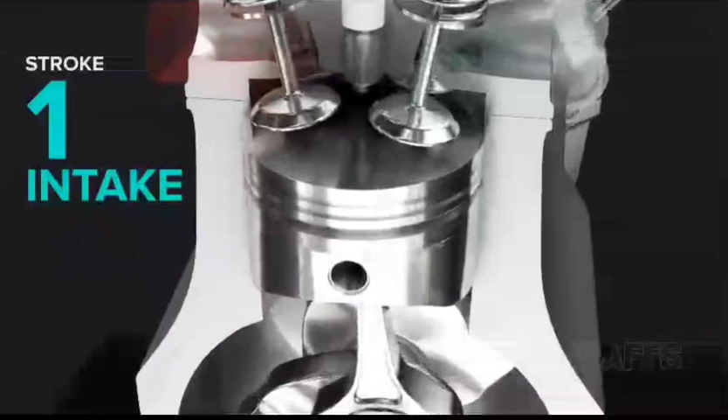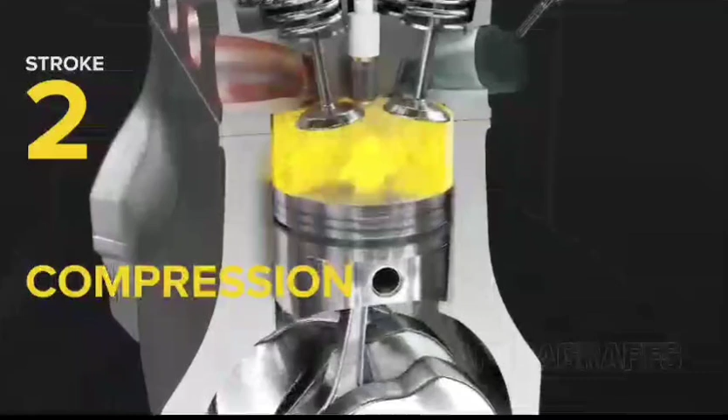First, intake. The piston descends, sucking an air-fuel mixture into the cylinder through the intake port, with both intake valves open. Next, compression. With all valves closed, the piston comes back up, compressing the fuel and air mixture for more powerful combustion.

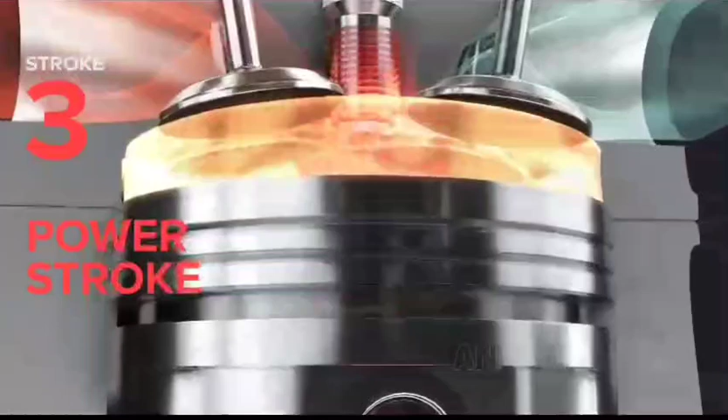Then, the power stroke. An electrical spark ignites the compressed fuel and air mixture, and the resulting combustion forces the piston to the bottom of the cylinder again. A connecting rod transfers this power to the crankshaft. Finally, exhaust. The piston comes back up, pushing the spent mixture out through open exhaust valves and the exhaust port,

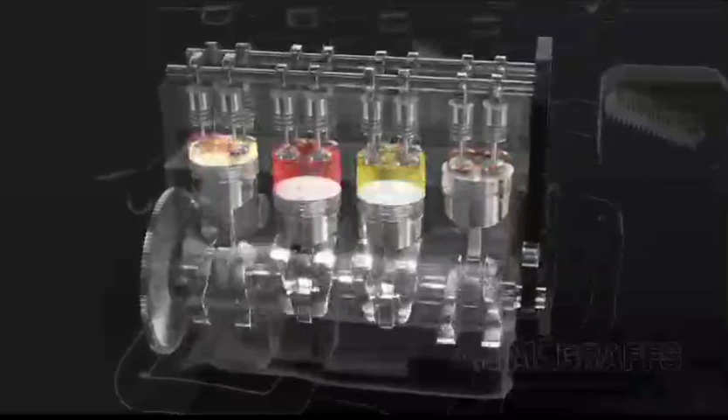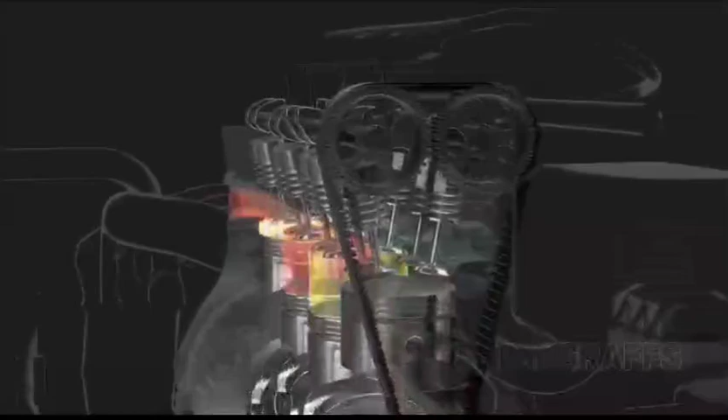connecting multiple pistons. For smooth power delivery, pistons take turns firing. The firing order for this engine is 1, 3, 4, 2. Camshafts with specially shaped cams push spring-loaded valves open in turn. Cam gears and a timing belt or chain link everything to the crankshaft, and it all spins together.

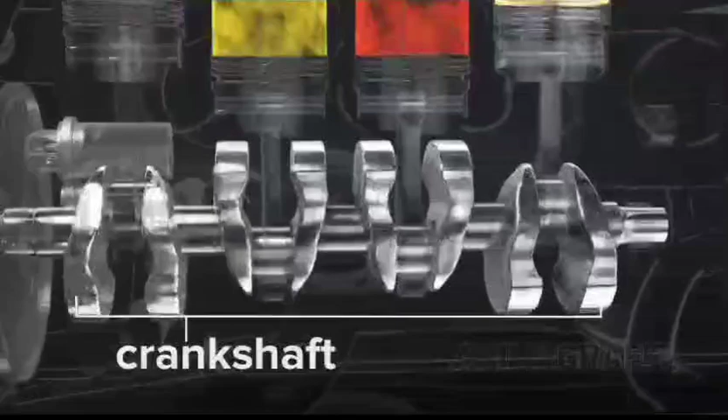The crankshaft translates piston power out of the engine. It has counterweights to balance against the pistons for perfectly smooth revolutions. This is what RPM means. We're counting the number of full crankshaft revolutions per minute.

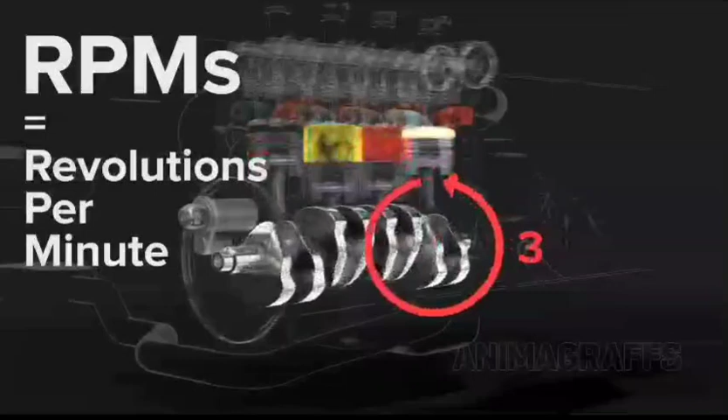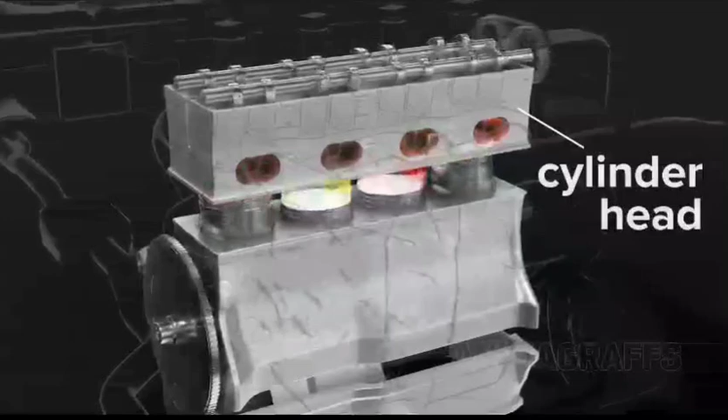The engine block holds the crankshaft and cylinders, and the cylinder head holds valves, ports, cams, etc. A geared flywheel sits at one side of the crankshaft for connection to a transmission. It's also where the starter connects to the system.

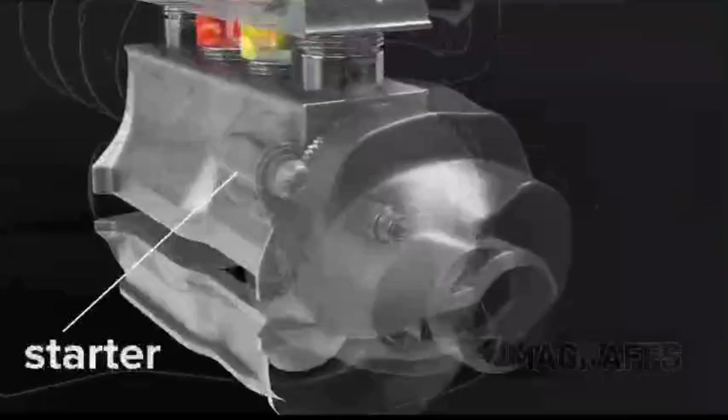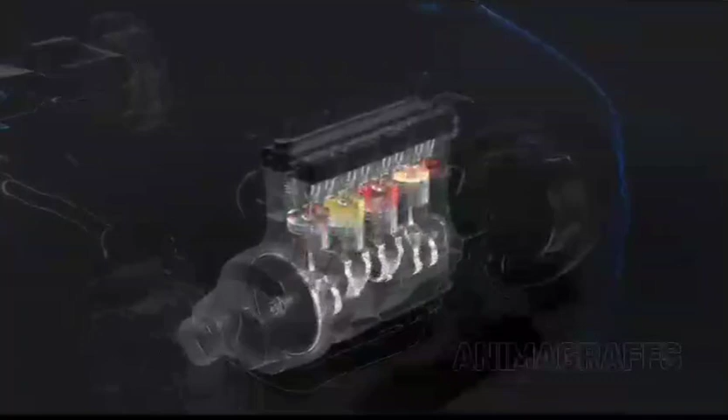This engine has 4 cylinders arranged in a single row, but there are many other possible configurations, like 6 cylinders with 3 on each side, angled in a V-shape, or 8. Despite different design goals, the basic engine parts are all there. Now let's look at other systems that support this combustion process.

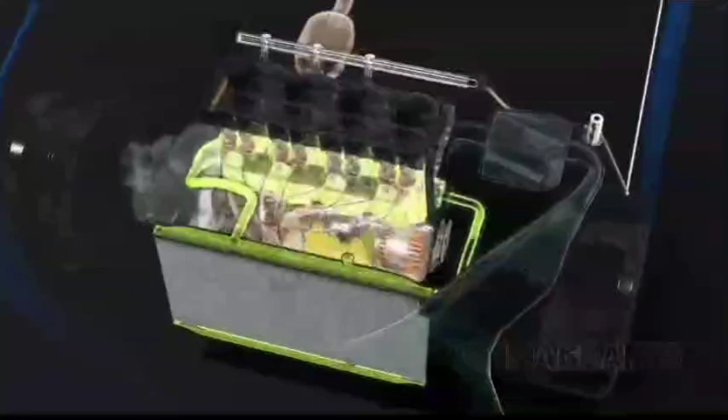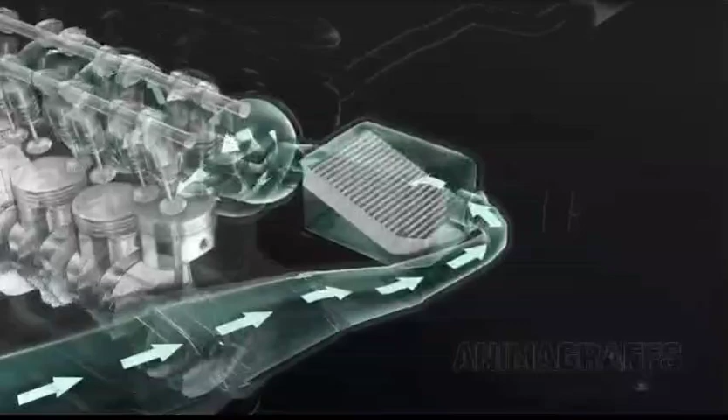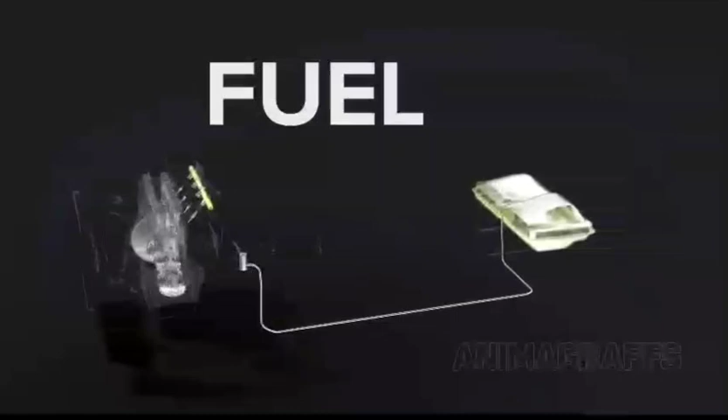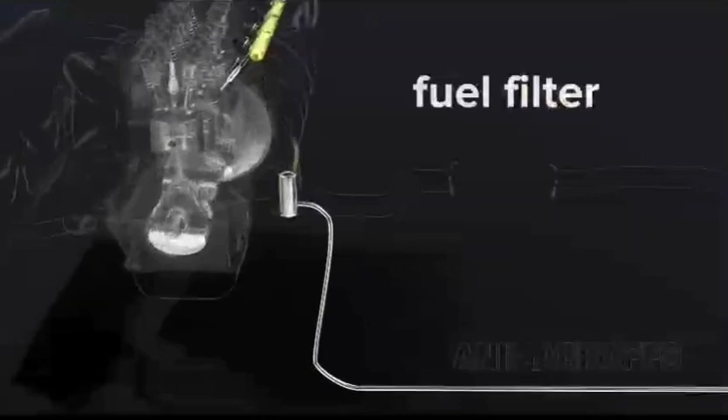Air intake. Air comes in through the air filter and then into the intake manifold, where it mixes with fuel before being sucked into individual cylinders through intake ports. Fuel. The fuel pump carries gas from the tank through a fuel filter to the engine, where fuel injectors emit a precisely timed spray of gas into the intake port.

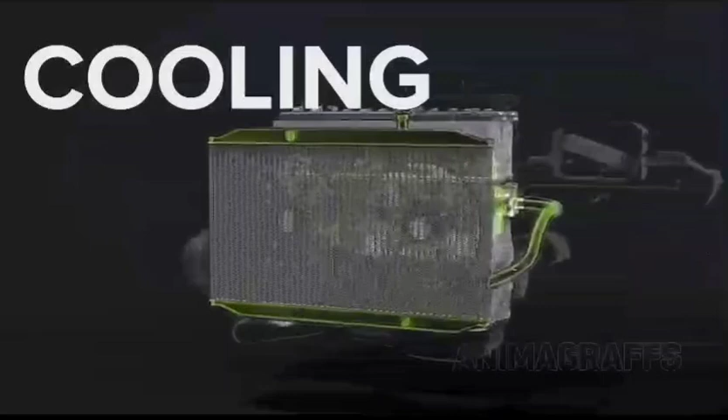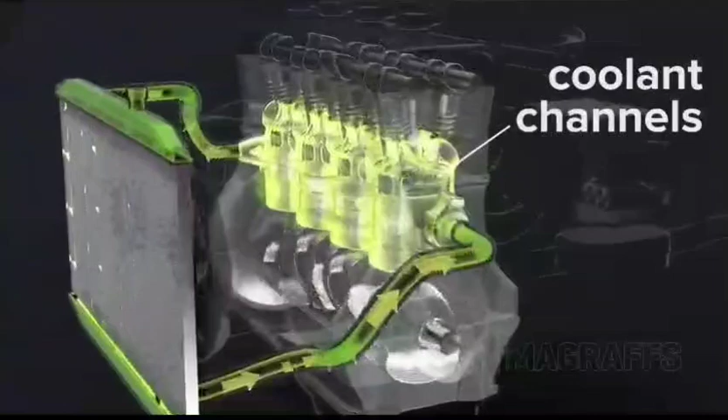Cooling. Engines get very hot during operation and require a cooling system. Coolant channels around the cylinders and through the cylinder heads carry a special liquid called antifreeze to keep temperatures within safe operating range. It's called antifreeze because it won't freeze in icy weather.

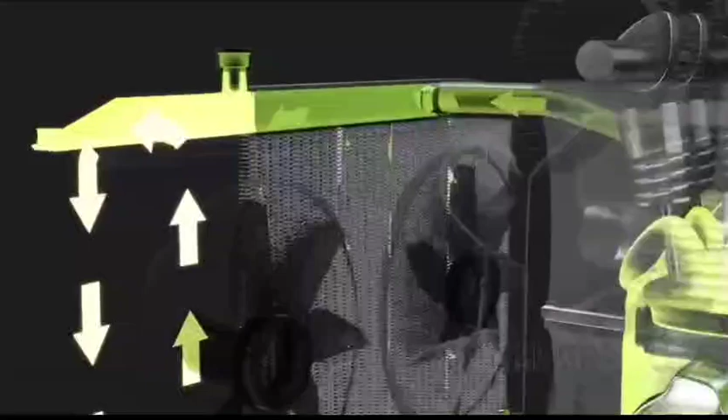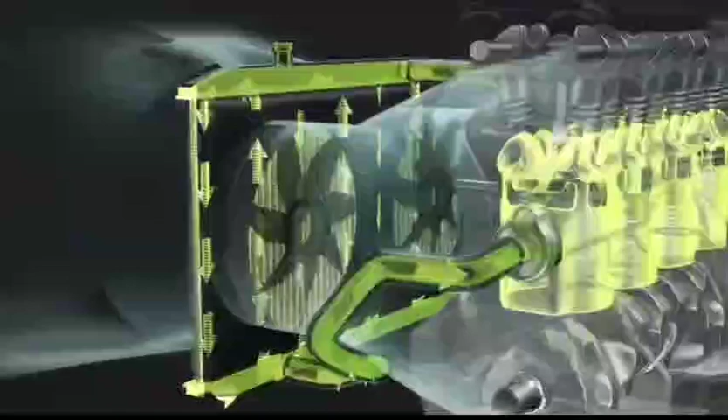After cooling hot engine parts, coolant circulates through the radiator. The radiator has a network of small tubes and fins. Coolant passes through these channels while air, pulled in by the radiator fan, blows by the tubes, cooling the hot liquid for recirculation.

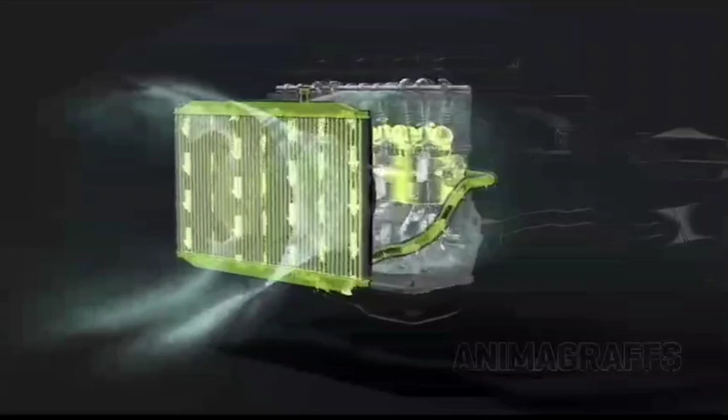A water pump keeps the coolant system flowing and properly pressurized. The thermostat regulates coolant temperature by either routing coolant back through the engine or to the radiator for further cooling.

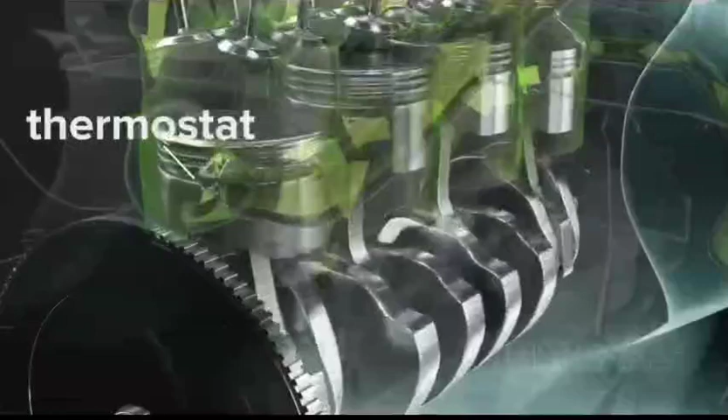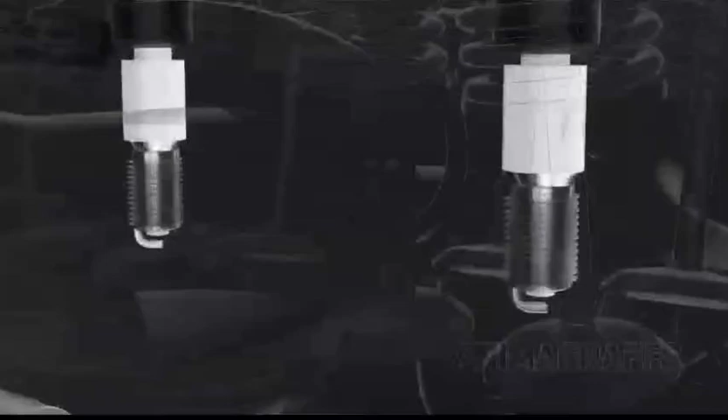Electrical. The spark plug delivers the electrical spark that ignites the fuel-air mixture for combustion. The metal core is insulated from the outer metal casing with porcelain. The spark jumps between these conductive surfaces.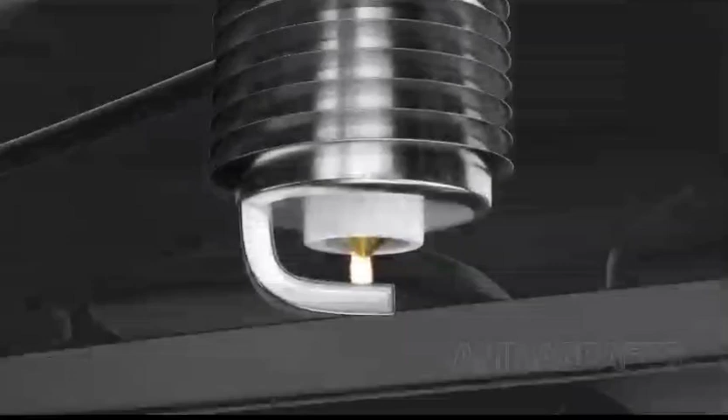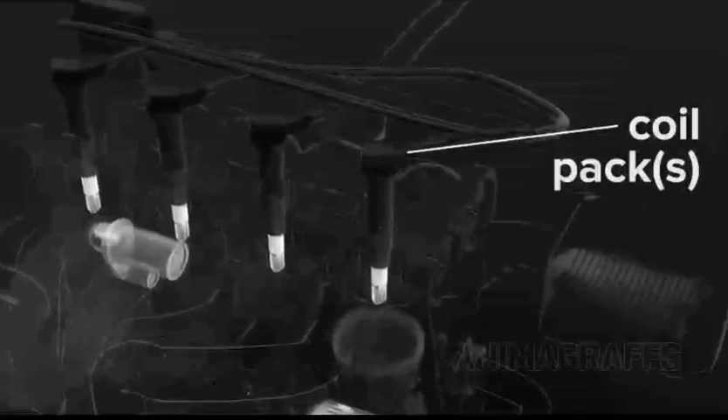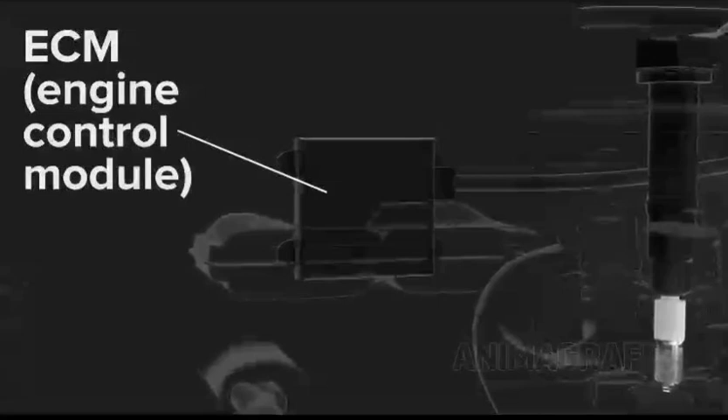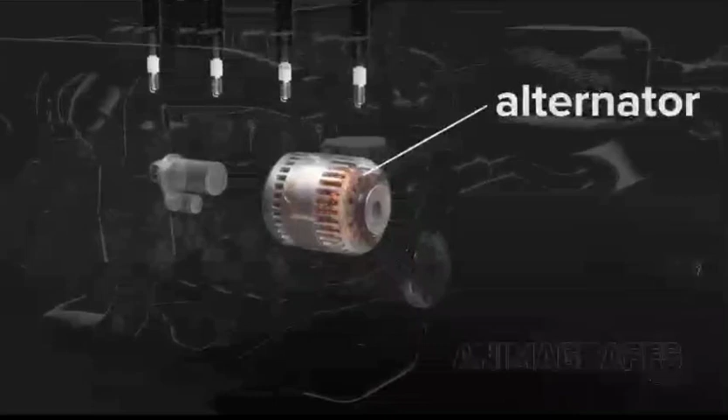The coil pack delivers electrical current to the spark plugs as directed by the ECM, or Engine Control Module. The ECM is a computer that directs many core engine functions like spark timing, valve open and close timing, air-to-fuel ratio, etc. The alternator works like a power generator, converting the engine's mechanical energy into electricity to charge the battery or run other electrical systems while the engine is running. The battery provides power to the starter for engine start.

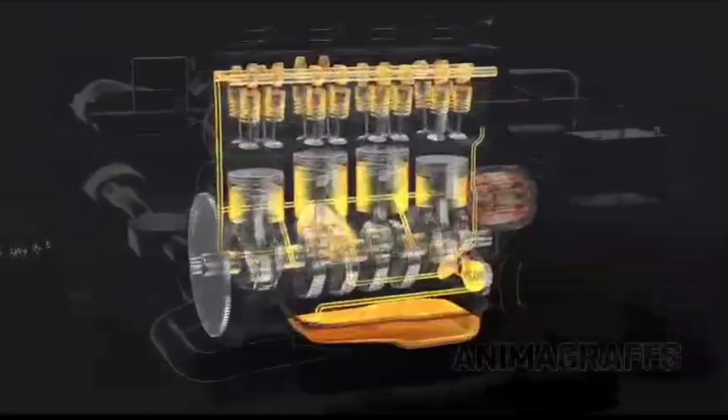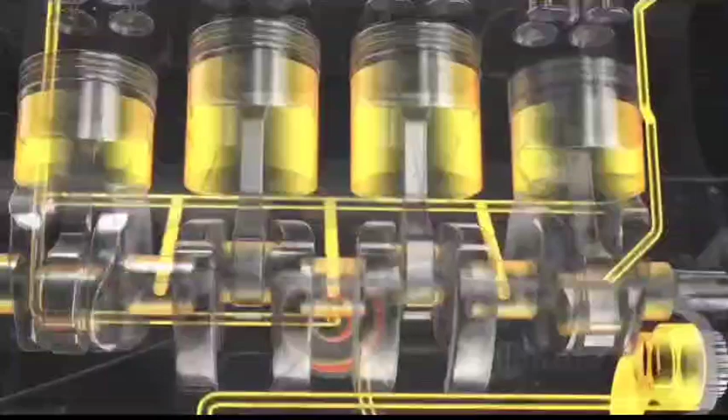Oil. Motor oil is used to lubricate, clean, prevent corrosion, improve sealing, and cool the engine by carrying heat away from moving parts. Rings around the top of the piston head keep oil out of the combustion process, while otherwise allowing the cylinder to be lubricated. Oil galleries are channels through the engine block and cylinder head that carry oil to various engine parts.

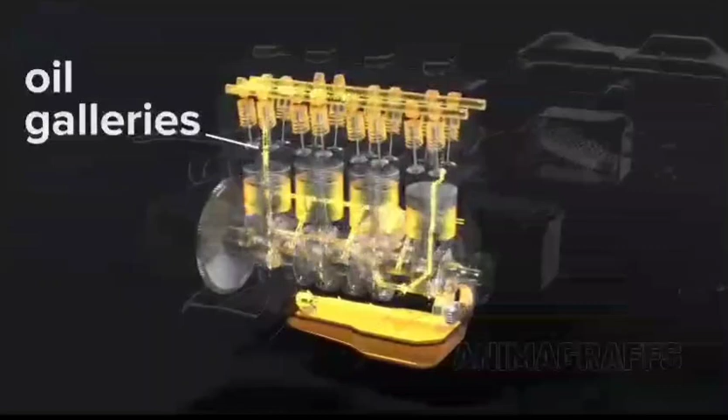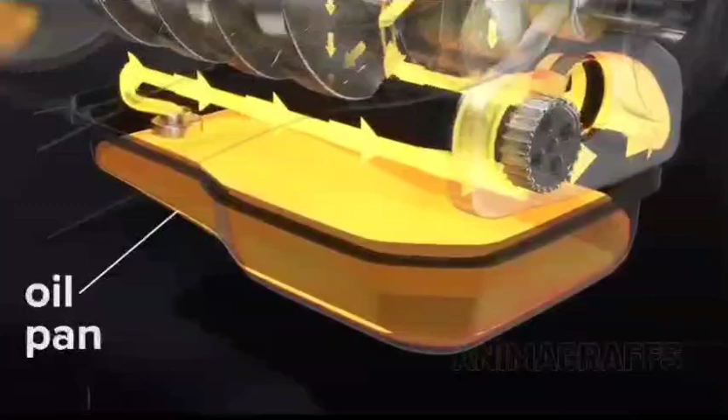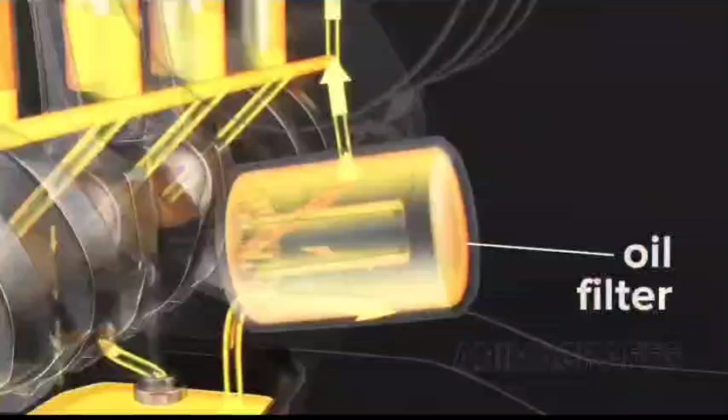Oil flows through the engine and back to the oil pan for recirculation. Oil rests in the oil pan when not in circulation. The oil pump keeps oil properly pressurized and flowing. And the oil filter keeps oil clean from contaminants.

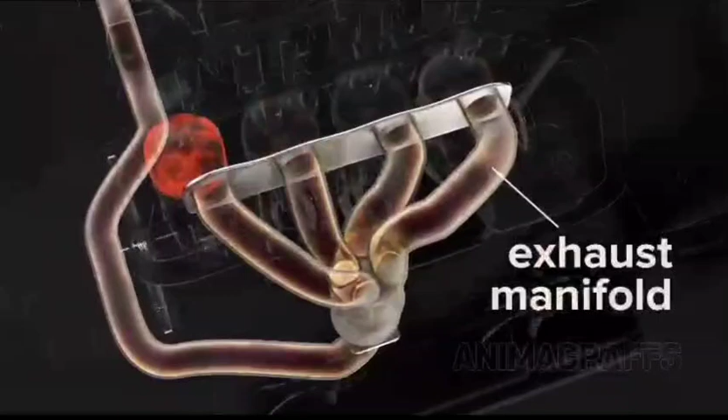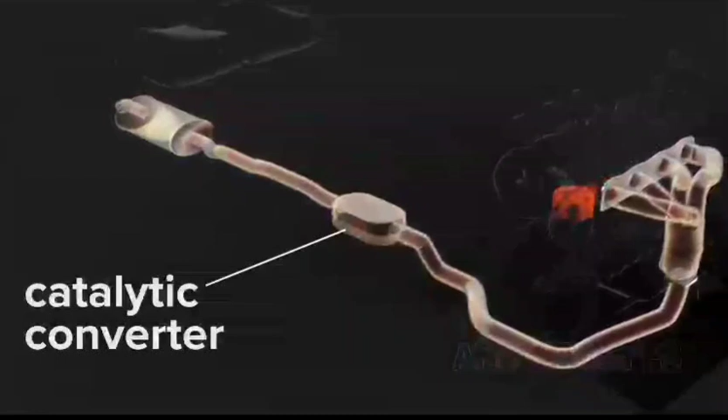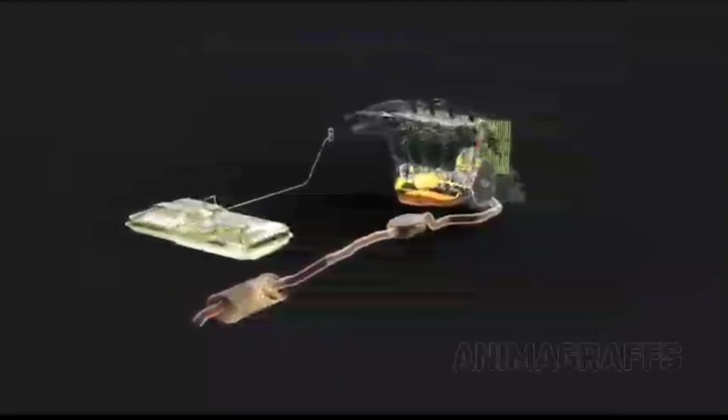Exhaust. The exhaust manifold collects gases from multiple cylinders into one pipe. Exhaust flows through the catalytic converter, which captures toxic chemicals in engine exhaust, and then out through a muffler that reduces exhaust noise. And finally, here's the full functioning engine with all the basic systems we've discussed.